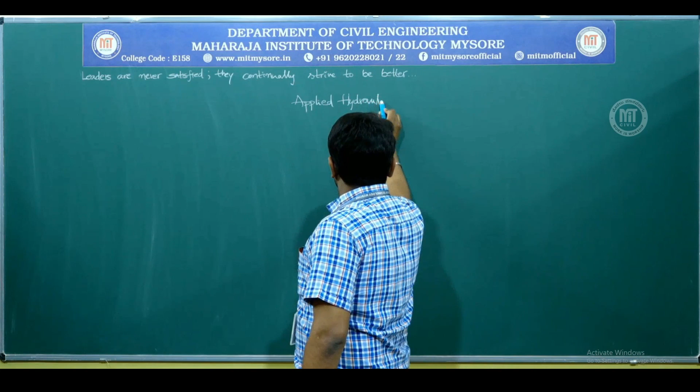We will try to accommodate as many program outcomes as possible through the teaching, but we cannot evaluate all 12 program outcomes through our course.

I repeat, the course outcomes that we write mean a student will be able to get so many things out of our course. The course is applied hydraulics, and that can contribute to attainment of the program outcomes, the 12 that I just quoted.

So through our teaching we may be touching upon all 12 POs, but we cannot evaluate all 12 POs through this course alone. So we would be matching certain of our course outcomes with the most relevant program outcomes.

So what is this course all about? This course is probably the continuation of fluid mechanics that you studied in the third semester. In continuation to that, we will have a lot of applications of the concepts that you learned in fluid mechanics, which forms the basis for learning applied hydraulics.

The syllabus of applied hydraulics contains a few things that are very important for a civil engineer to know. The first module, of course, following the system of our Visvesvaraya Technological University's syllabus, you will have 5 modules.

Each module will be given 20 marks in the final examination, wherein you will have 2 full questions from each module. That means a question paper of 100 marks will comprise questions for 200 marks total, that is 2 full questions from each module. That becomes 40 marks per module, and you will have to choose one among them and write in full to get the 20 marks out of it.

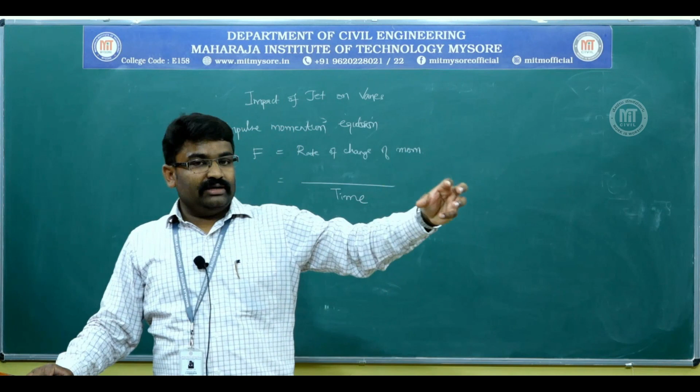If you observe carefully, in a flow for a particular length, the mass of the liquid flowing at the entrance will always be equal to mass of the fluid at the exit, provided there are no losses. In an ideal condition there shall be no losses and hence mass shall remain the same. So in case of change of momentum, mass remains the same.

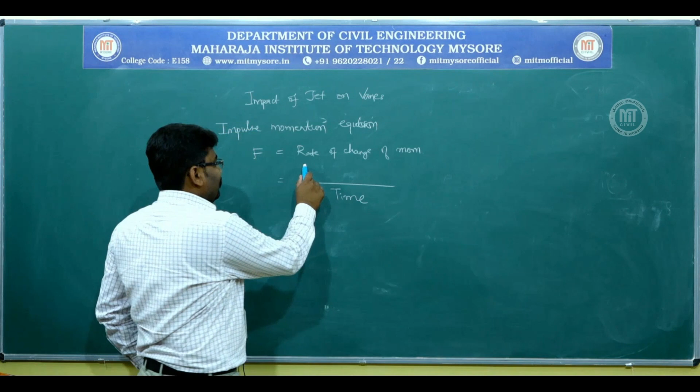So you can write it as initial momentum as mass multiplied by initial velocity whole subtracted by final momentum, that is nothing but mass multiplied by final velocity. In both the cases mass remains same. So I first write it mass multiplied by initial velocity minus mass multiplied by final velocity. This must be equal to F.

So you can now observe, you can take out mass from both the terminologies: mass multiplied by initial velocity, I will name it V1, minus final velocity, I will name it V2, whole divided by time. In this equation, you can observe a terminology called mass by time. What is mass by time? Where actually have you seen mass?

If you get into the basics of mechanics, where did you first use mass? It is in case of the first basic property of fluid, which is stated as mass density. What is mass density? Mass density rho is equal to mass by volume. So I need mass here. Therefore, mass must be equal to density into volume. Mass is nothing but density into volume.

Now what do I have here? Mass by time. So I will write here, therefore mass by time is equal to density rho into volume by time. But what is volume by time? Volume by time is nothing but meter cube per second. Meter cube per second is the unit of discharge. Discharge is nothing but denoted as Q. So mass by time can be replaced by rho into Q.

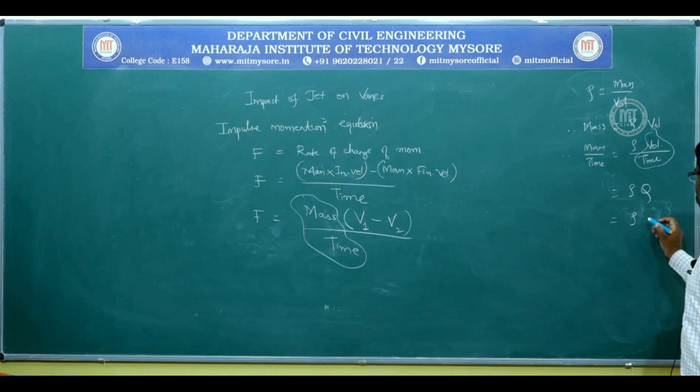What is rho into Q? Rho is a constant I will retain as it is. What is Q? Q in other terms is nothing but area multiplied by velocity. So when the jet is coming out of the nozzle, area of cross section of the jet multiplied by the velocity with which the jet is coming out is termed as V. So Q can be replaced by A into V. So basically mass by time can be replaced by rho into A into V.

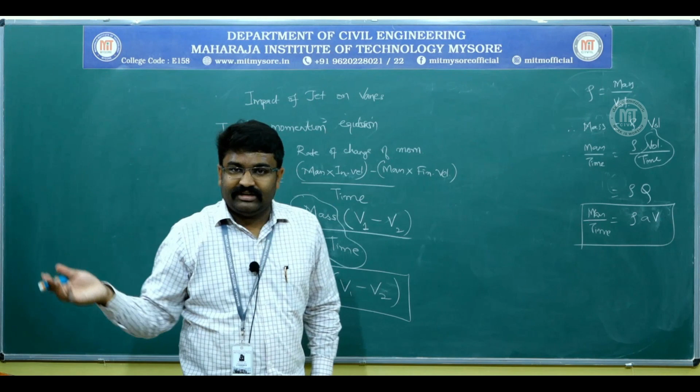So F is equal to rho into A into V whole multiplied by V1 minus V2. This is a very important equation based on which you derive rest of the equations and solve a lot of numerical problems related to impulse or impact of jet on vanes.

Now this F, when you consider it in the x direction, this V1 and V2 initial and final velocities will be in the x direction. When you consider F in y direction, then these V1 and V2, the velocities, initial velocity and final velocity will be the velocities in y direction, which can be written as

Fx, force in x direction, must be equal to rho into A into V. These things don't change because these belong to the jet. Rho into A into V whole multiplied by V1 in x direction minus V2 in x direction. Similarly, Fy is equal to rho AV into V1 in y direction, V2 in y direction.

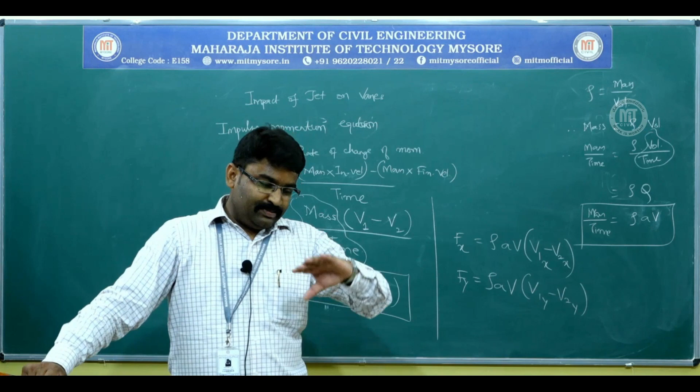If at all the force is neither in horizontal nor in vertical direction, you will have to split them into x and y components and use them here.

Once we have understood the impulse momentum equation, it is now wise enough to move on to the actual study related to this module, that is impact of jet on vanes. In fact, I can now say impact of jet on curved vanes.

In curved vanes, there are two types: symmetrical curved vane and unsymmetrical curved vane. First we will study the symmetrical curved vane stationary, then unsymmetrical curved vane being stationary, and in later stages we can study curved vanes already in motion.

The first case I will take up is impact of, or you can also term it as force exerted by, jet on stationary symmetrical curved vane - both terms mean the same.

Once you take a curved vane, the jet can come and strike it at the center, or the jet can strike it at one of the tips. First I will take the impact of jet on stationary symmetrical curved vane getting hit at the center. So first I will show you how a curved vane looks like.

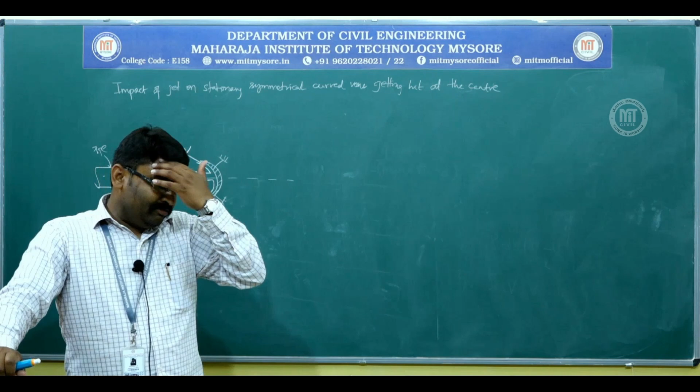But as shown in the derivation of the impulse momentum equation, we will be requiring force either in the x direction or in the y direction, and hence I will have to split this into two components, one vertical and one horizontal.

So what I will do is assume that this final velocity makes an angle theta with the horizontal, and perpendicular to it will be velocity in the y direction. Since this is theta and this is v, the horizontal component will be v cos theta, and the vertical component will automatically become v sin theta. I will show the jet in a different color so that you can easily understand.

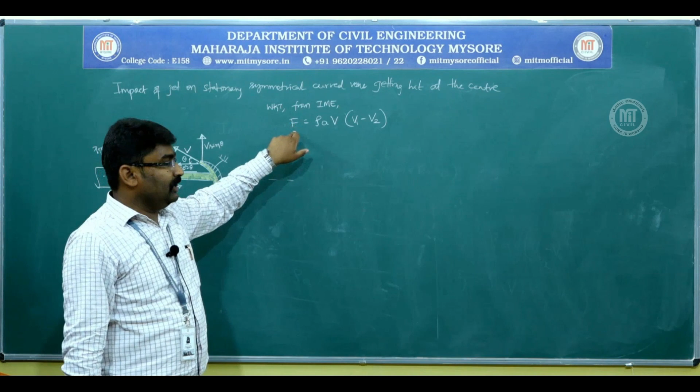Now the force exerted by this jet on the curved vane is given by the impulse momentum equation. We know that F is equal to rho A V into V1 minus V2. So to get the impact of this jet, I need to find out F. To get F, what do I have? One in x direction and the other in y direction.

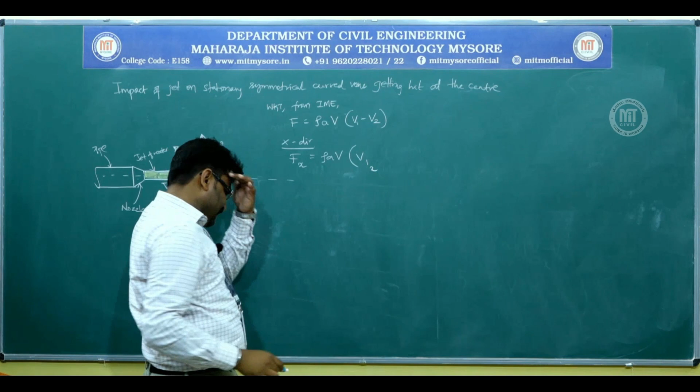So I will first take the horizontal direction, or simply x direction. In x direction, F changes into Fx. Rho AV remains as it is because it is a stationary vane and the jet is not changing its velocity even while striking the vane. So rho AV into V1, since I have taken F in x direction, V1 must also be in x direction, minus V2 in x direction.

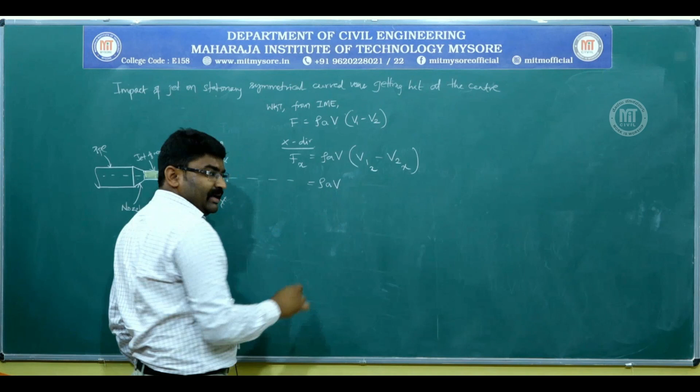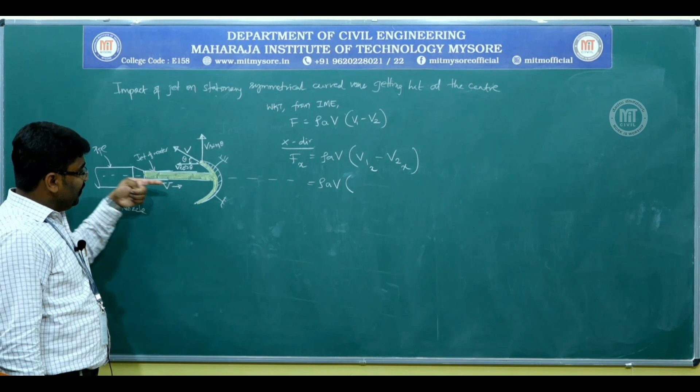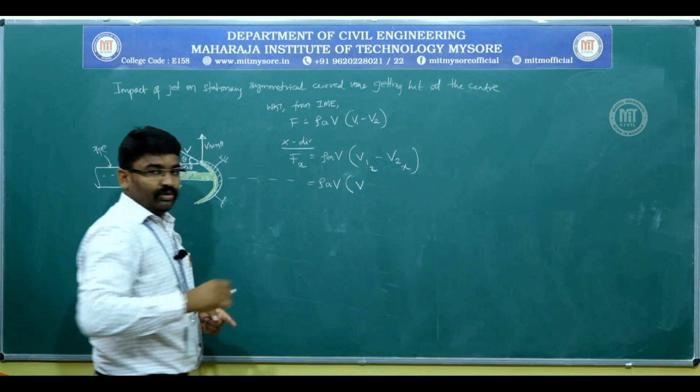So what is rho AV? It remains as it is because the velocity with which the jet is coming is V only, into V1x. What is V1x? That is the initial velocity in x direction. If you observe what I have taken, the initial velocity is nothing but V. So V1 in x direction is V only, minus V2x. V2 is the final velocity in x direction. If you observe, the final velocity is also V because there is no shock or loss.

But that velocity was neither purely in x direction nor in y direction. So I have split it into two components, out of which the x component or horizontal component is V cos theta. But you can clearly observe from my drawing that V cos theta is traveling in the negative x direction. So V2 in x direction is nothing but minus V cos theta. Be careful in understanding this.

V1x minus, that I have retained as it is. V1 in x direction is V, minus V2 in x direction. What is V2 in x direction? That is the final velocity in x direction, which is V cos theta in the negative x direction, so minus V cos theta.

This on simplification gives rho A V into, taking V outside, 1 minus of minus becomes plus, so that is 1 plus cos theta. On further simplification, Fx is equal to rho A V into V, which is V square. So Fx equals rho A V square into 1 plus cos theta.

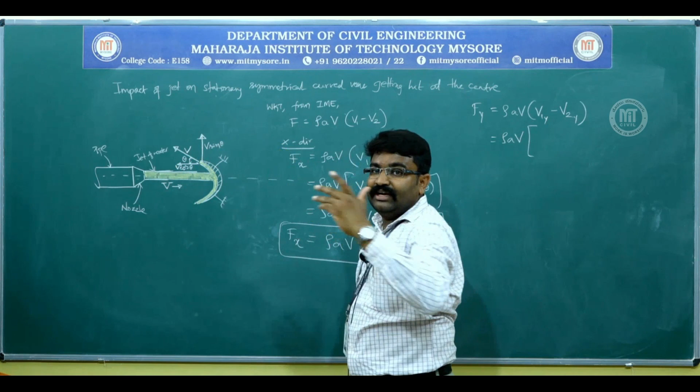So when you take impulse momentum now in y direction, that becomes Fy. Fy is equal to rho A V into V1 in y direction minus V2 in y direction. What is V1 in y direction? That is the initial velocity in y direction. But the initial velocity is in pure horizontal direction, which means it will not have a vertical component at all. So V1 in y direction becomes 0, minus V2y, the final velocity in y direction.

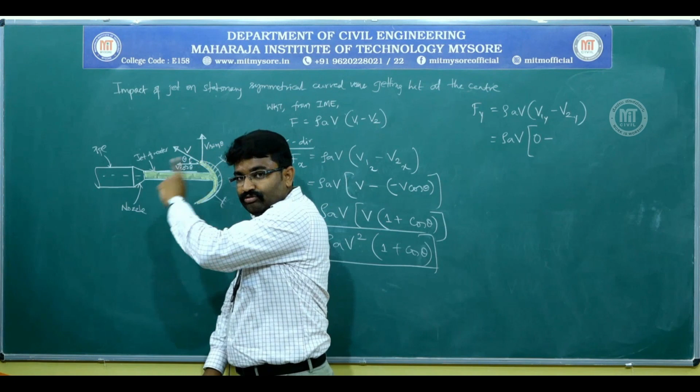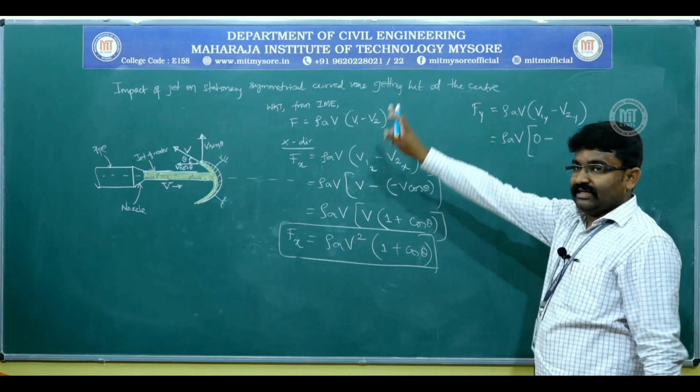If you observe, the final velocity is also V in magnitude but was neither purely horizontal nor vertical. So I had already split that into two components, out of which the vertical component was V sin theta traveling in the upward direction. Upward is taken as positive, and hence V2 in y direction is V sin theta. So this can be written as Fy is equal to minus rho A V square sin theta. This is nothing but your Fy.

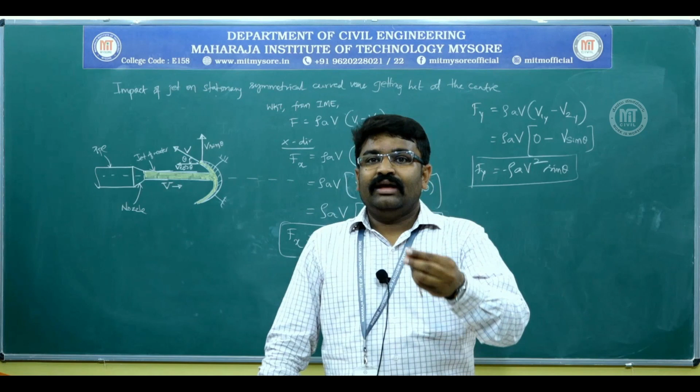Using these equations, you can straight away solve numerical problems related to the impact of jet on a symmetrical stationary curved vane getting hit at the center. But I do not advocate using these equations straight away and substituting the values. Instead, by understanding the impulse momentum equation, you can apply it then and there itself, and within one or two steps derive the expression and get the values to solve the numerical problem.

Moving on, we have impact of jet on a symmetrical curved vane getting hit at the tip. Instead of the center, I have taken one of the tips. So I will again draw the line of reference because it is again a symmetrical curved vane, and I will draw that curved vane. But instead of the jet hitting it at the center, I have the jet striking it at one of the tips. So I will draw the jet striking it at the tip, draw the nozzle, and from there you have the pipe.

So this is nothing but your pipe. This is nozzle. This is jet of water.

Now in the first case, when the jet was horizontal, there was no need of splitting it into components because the jet itself was in the pure horizontal direction. But now, since it is striking at some angle, if the velocity with which the jet is coming out is V, its direction is neither horizontal nor vertical, so I will have to split that into horizontal and vertical components.

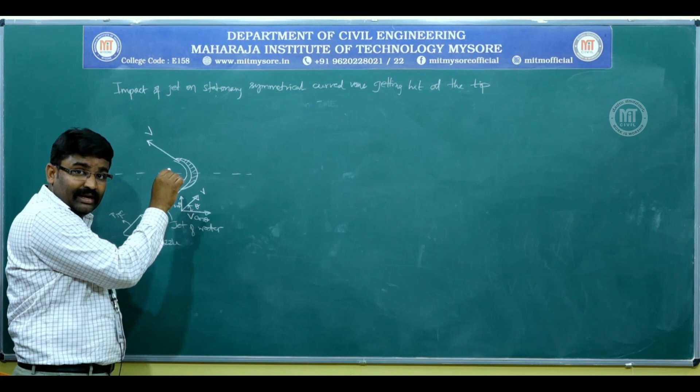Since the vane is symmetrical, the angle with which the jet enters the vane will remain the same even while exiting. That means the final velocity will also make an angle of theta with the horizontal, making the horizontal component equal to V cos theta and vertical component equal to V sin theta.

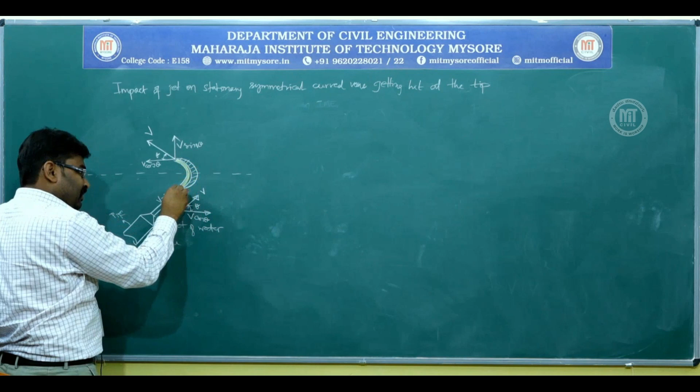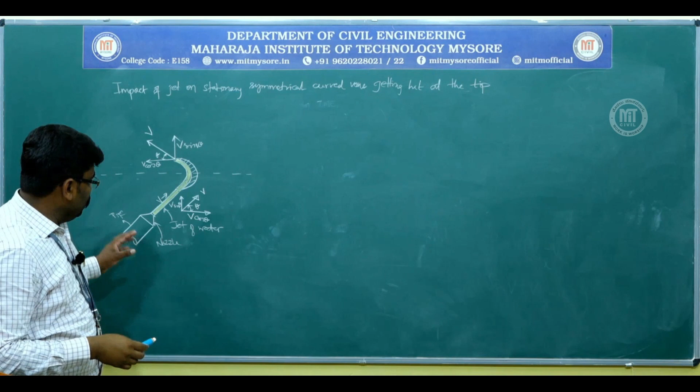So this you need to understand why the velocity has remained the same. Velocity has remained the same because the vane is smooth, and the angle has not changed because the vane is symmetrical. So now again I need to find out the force exerted by this jet on the vane.

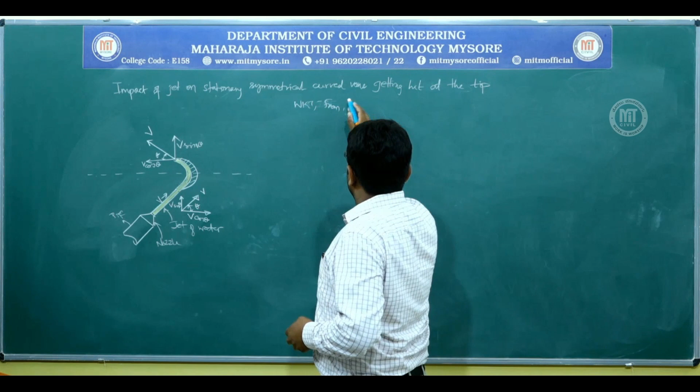Force exerted by the jet on vane is governed by the impulse momentum equation. So we know that from impulse momentum equation, F is equal to rho a v into v1 minus v2.

So I will first take in x direction as usual. F in x direction must be equal to rho a v into v1 in x direction minus v2 in x direction. So rho a v I have written as it is into v1 in x direction.

Observe carefully, v1, that is initial velocity, which was neither in horizontal nor in vertical direction. So that resultant initial velocity I have split into two components, of which horizontal component is v cos theta and is moving in the positive x direction.

So v1 x becomes v cos theta, minus what is v2 in x direction, that is final velocity in x direction. Final velocity was v in magnitude but was neither in horizontal nor in vertical, so I have again split that into two components, of which the horizontal component is v cos theta in magnitude but the direction is negative x as observed from the diagram. So I will write it as minus v cos theta.

So on simplification you have rho a v into, you can take out v from both the components, v into cos theta, minus of minus is plus, that is again cos theta. So cos theta plus cos theta is 2 cos theta. So you can write Fx is equal to 2 cos theta into rho a v into v, that is rho a v square. So 2 rho a v square cos theta is the force in x direction.

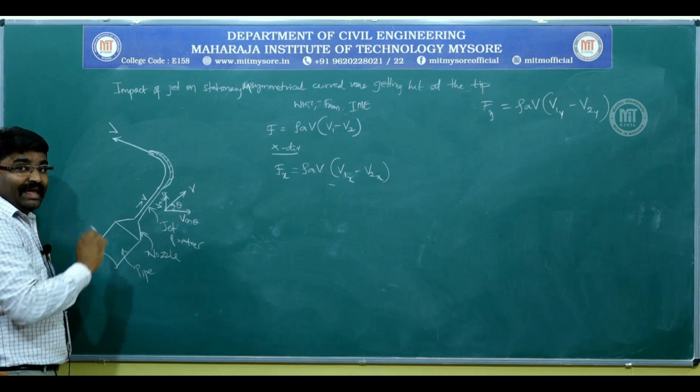But what changes from the previous case is the angle made by the velocity component at inlet and outlet. At the inlet, assuming the jet makes an angle theta with the horizontal, the horizontal component is v cos theta and vertical component is v sin theta. But at the exit, the angle shall not remain the same, so I assume the angle made by the exit velocity as phi with the horizontal, giving horizontal component v cos phi and vertical component v sin phi.

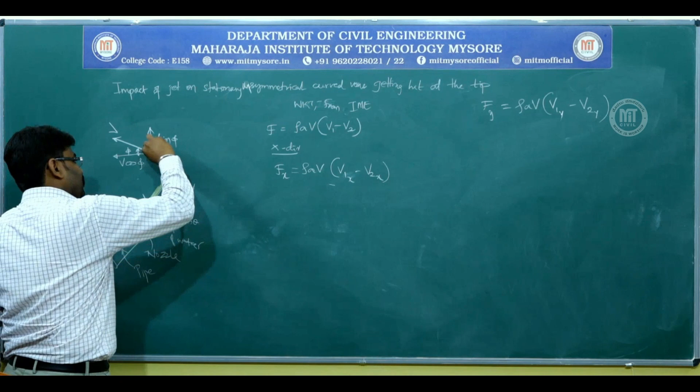To get the impact of this jet on the unsymmetrical curved vane getting hit at the tip, I again take the help of the impulse momentum equation: F equals rho a v into v1 minus v2.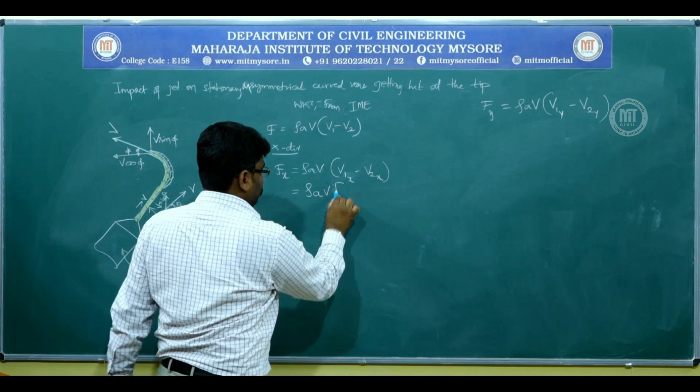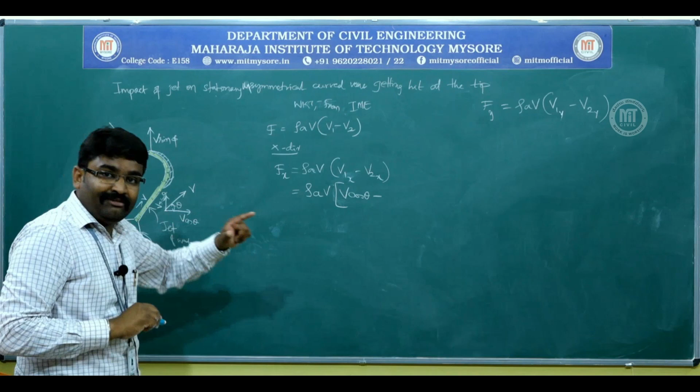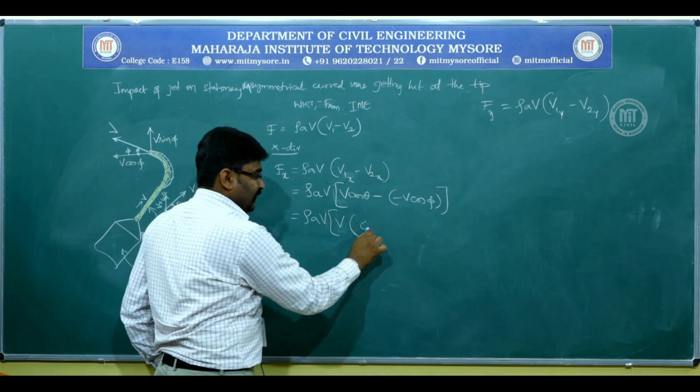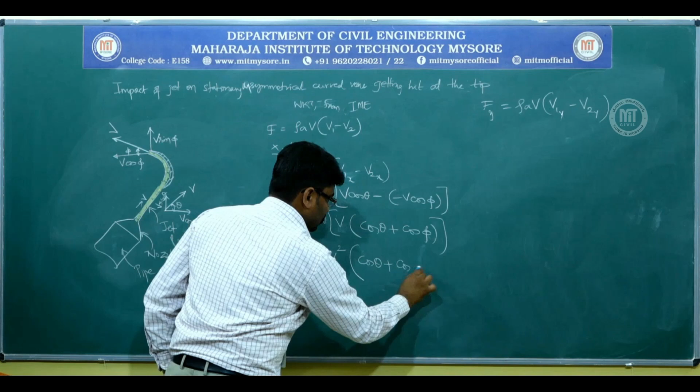In the x direction, Fx equals rho av into v1x minus v2x. Rho av remains as it is. v1x, the initial velocity in x direction, is positive v cos theta. v2x, the final velocity in x direction, has magnitude v cos phi but travels in the negative x direction, so it becomes minus v cos phi. On simplification this is rho av into v, with v as a common factor, giving cos theta minus minus cos phi, which is cos theta plus cos phi. So finally Fx equals rho a v square into cos theta plus cos phi.

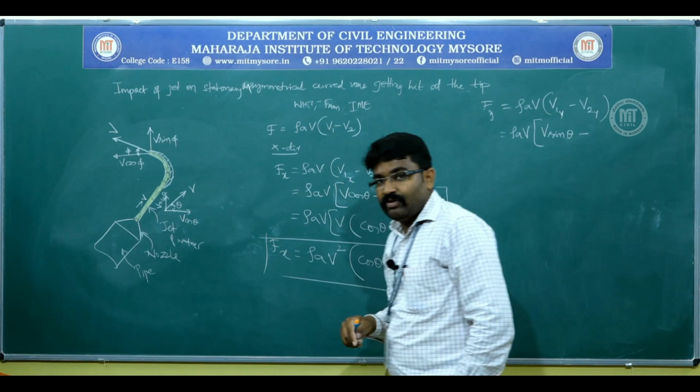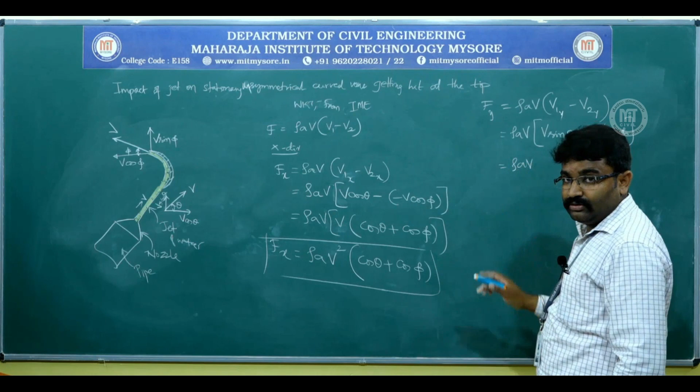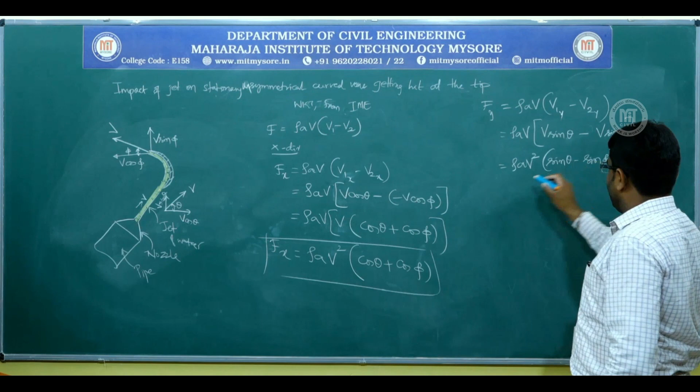Similarly, in the y direction, Fy equals rho a v into v1y minus v2y. v1 in y direction is positive, with magnitude v sin theta. v2y, the final velocity in y direction, is v sin phi, traveling upward so it is positive. This gives rho a v into v sin theta minus v sin phi, and taking v outside and multiplying gives v square, so Fy equals rho a v square into sin theta minus sin phi.

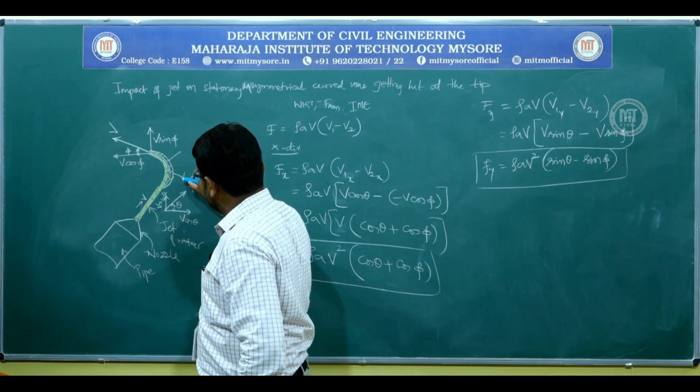These three basic derivations all had a fixed vane. The stationary curved vane getting hit at the center was studied, then the stationary curved vane getting hit at one of its tips, and in those two cases I considered a symmetrical curved vane. In the present case, the final case for this class, I chose an unsymmetrical curved vane getting hit at the tip. In all three cases the vane was very smooth, leading to no loss in velocity, so the velocity with which the jet entered remained the same throughout and at the outlet.

I hope these three equations and the methodology I adopted to derive them will help you in learning the impact of jet on vanes, solving various numerical problems on the same, and in continuation, learning about turbines and pumps in the later stages of module 4 and 5. Thank you.